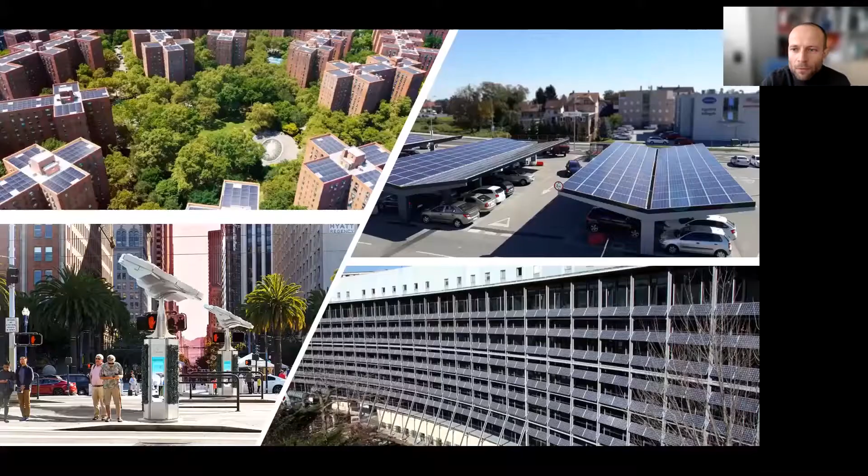And we have a mission that maybe it's less romantic than going to the moon, but that it's equal or more important than this old mission. And so, as I said, from my point of view, we have some solutions to promote the reduction of CO2 emissions in our cities. As you can see in these pictures...

I'm showing a lot of PV systems, different photovoltaic systems integrated in different kinds of buildings, on the roof, on the facade, integrated on the parking lots for instance, and also integrated on public areas that nowadays, today, are not used in a big way to produce electricity.

So let's see why we are focusing on cities. Because we know that more than half of the world population lives in cities. Cities consume about three quarters of the global energy used worldwide.

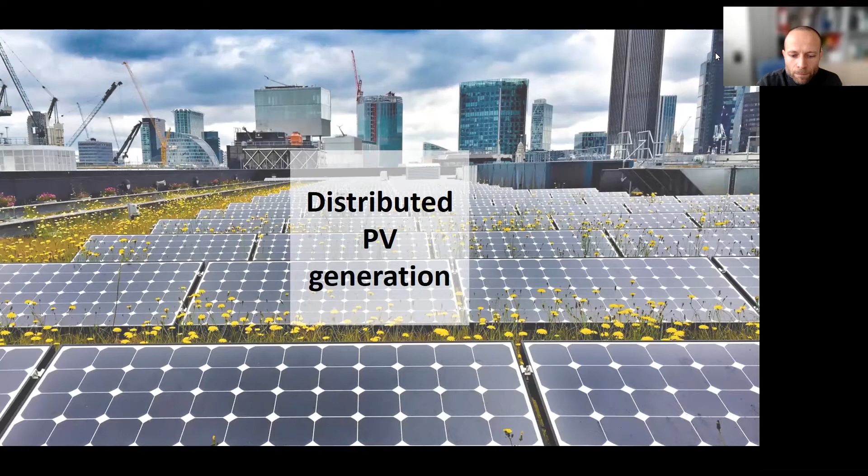In this presentation, I will talk about distributed PV generation as a tool to reduce the emissions produced by cities. First of all, I would like to clarify why we are speaking about distributed generation. Which are the advantages of these models in comparison with the centralized model we are used to the most today? First of all, distributed generation can improve the efficiency of the energy system.

This is very intuitive to understand: if we produce the electricity we use on the roof of our house or our office, or on the facade of our building, we are improving the efficiency of the overall system.

Think for a moment what happens with the food we buy to live. We are aware that if we buy an apple that has been grown in proximity of my city, I'm reducing the emissions of the food sector. And we need to make the same thing with energy. Energy cannot be a thing that comes from away, but it needs to be a thing we can produce closer to the loads.

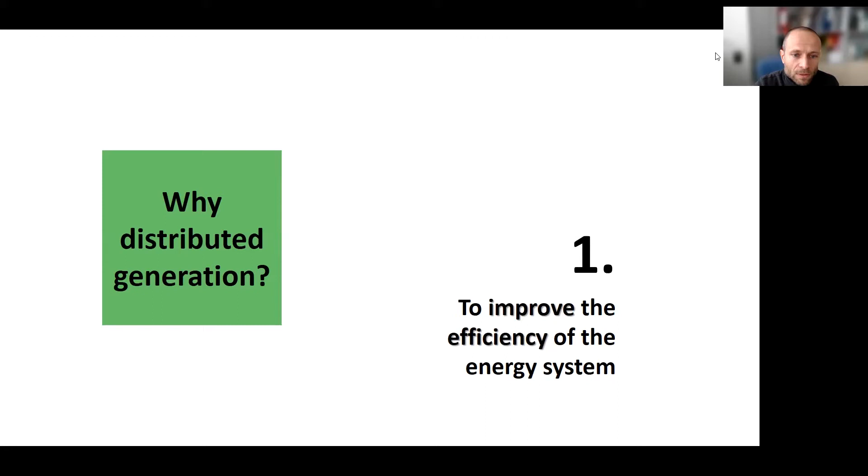So this is clear that we can improve the efficiency of the overall energy system if we introduce more distributed generation systems. The second point here is that to mitigate climate change impacts, it's much more relevant distributed generation than centralized generation.

I'm referring here not only to the reduction of emissions, but to the resilience of the system. We can think, for instance, that the frequency of extreme weather events like tornadoes, heat waves, extreme cold waves, etc. is going to go up in the next years due to climate change.

So the distributed generation systems are more robust compared to the centralized system, because if we can generate near the loads, we have more control of the elements that can work well or not work well. So we are providing a much more safe energy system from the point of view of energy supply.

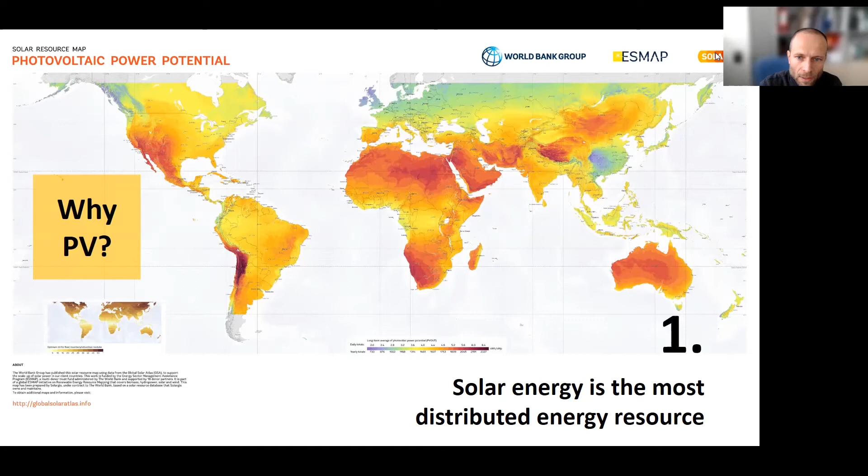The first one is that solar energy is the most distributed energy resource that we can use today. So it seems logical that if we are promoting a distributed generation system, we have to use a distributed energy source to implement it. You can see in this map that we have very wide access to solar potential worldwide, and we can use this technology in very different latitudes and very different sites worldwide.

The second reason is that PV is one of the cleanest and cheapest ways to produce electricity today. We need solutions today, not within 10 or 15 years, because we need to reduce emissions today to mitigate the effects of climate change. So let's see some numbers to justify this.

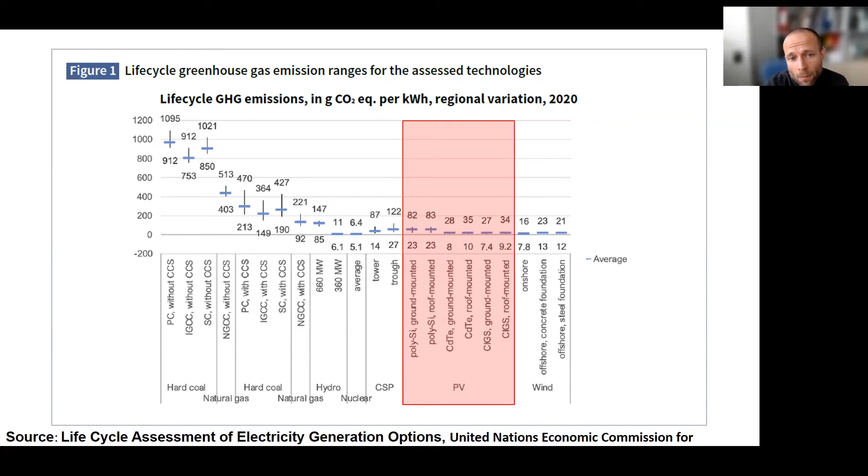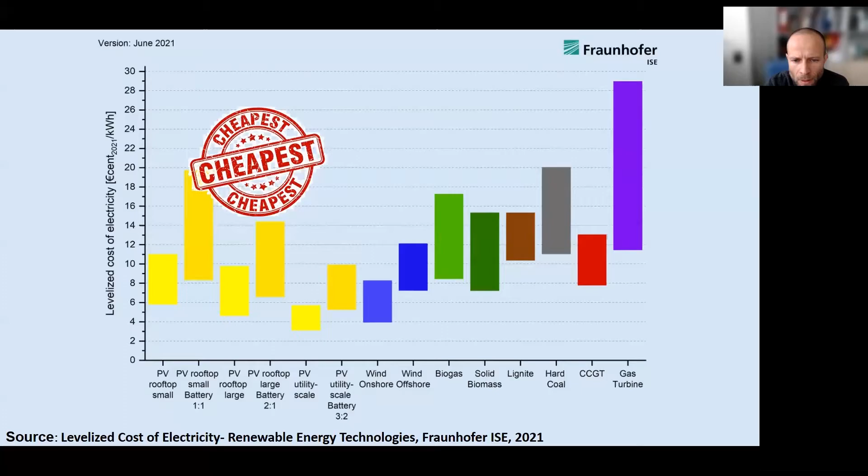So these numbers justify that we have today about 760 gigawatts installed overall in the world, but the big number is that about 20% of this power was installed in one year, last year in 2020. So this is a market that is growing very fast, and it is growing very fast because it's cheap to produce electricity with these systems.

And also, I would like to highlight that the share of distributed PV generation is increasing in the last years.

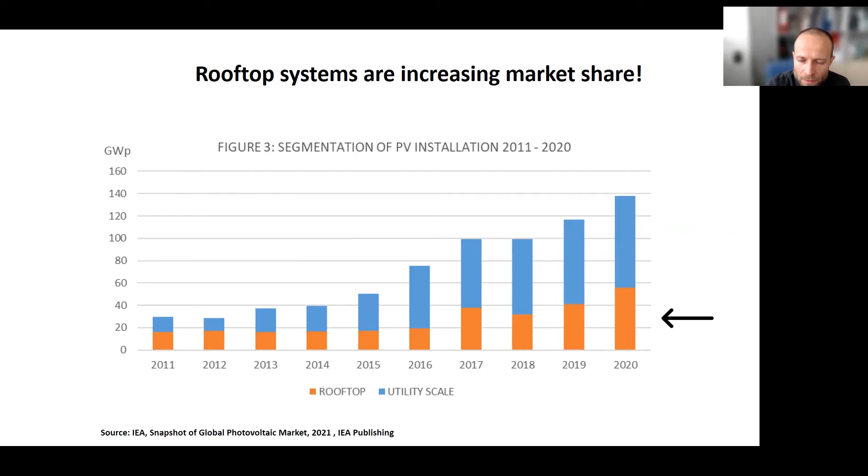You can see here that PV systems, not all of them are distributed systems, because we have also a lot of PV plants, but the number of rooftop installed systems is increasing market share. So this is good news, because the distributed model is improving its weight in the market of PV.

Another reason is that cities' electricity demand will increase in the next years due to two main factors. The first one is the electrification of mobility, with the diffusion of electrical vehicles, but we also have to take into account the electrification of heat, based mainly on the use of heat pumps for heating in buildings in general. These are the two main reasons for the increase of electricity demand in cities.

So we need a technology that produces electricity in cities without increasing emissions. I would also like to highlight that PV can be extensively used in human settlements, because it's the safest source of energy we can use today.

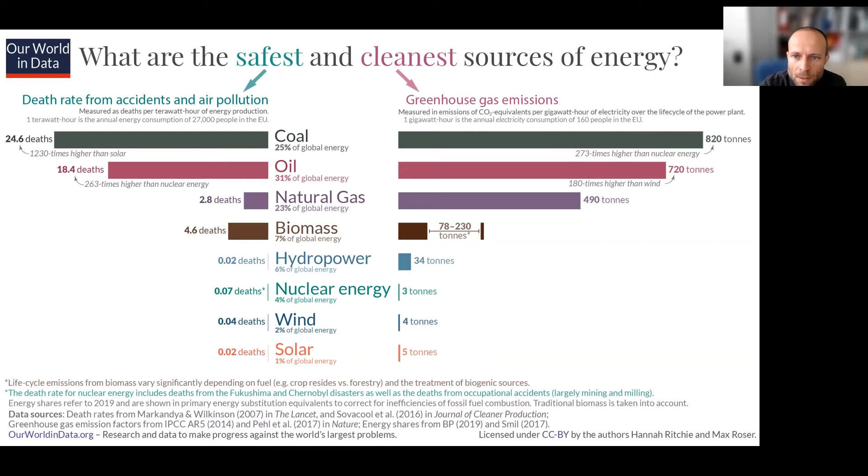Solar energy only has 0.02 deaths per terawatt hour of energy production. So we can confirm that solar energy is safe for human life, and also safe for the planet, as you can see on the right side with the greenhouse gas emissions of these different technologies.

Last but not least, PV can be beautiful. We live in Europe, we live in very beautiful cities. We cannot renounce the beauty of our city to produce energy, to produce electricity.

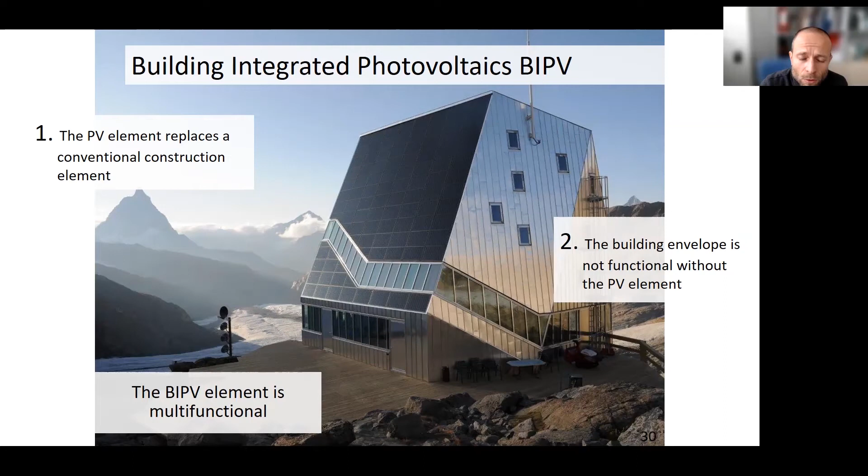You can see in this other example, a mountain hut in the Alps, that the PV element replaces a conventional construction element. We are not adding PV modules to the building, but designing the building with PV elements - a very different thing. You can see that the building envelope is not functional without the PV element. So the BIPV element is multifunctional.

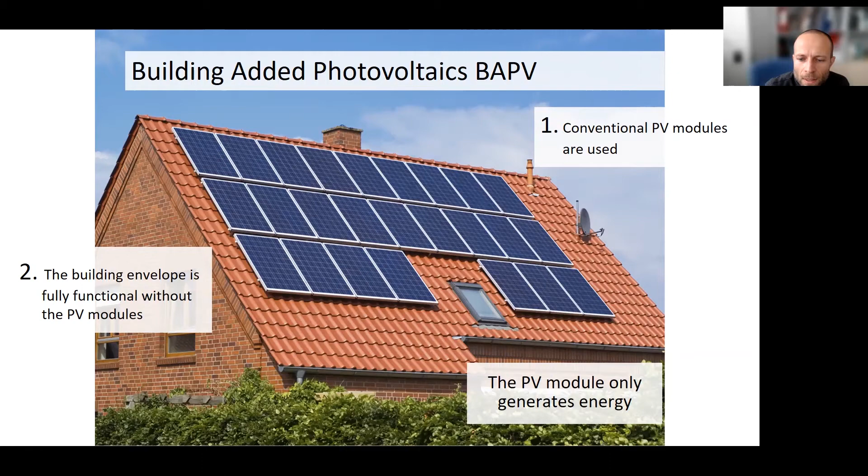This is very different from the system we see most frequently in our cities, in which conventional modules are used. The building envelope is fully functional without the PV modules, and the PV modules only generate energy.

So if we compare both solutions, you can see that obviously there are a lot of differences. It's like comparing the Champions League on the left side with the amateur league of my town on the right side, from the architectural point of view and from the quality of integration.

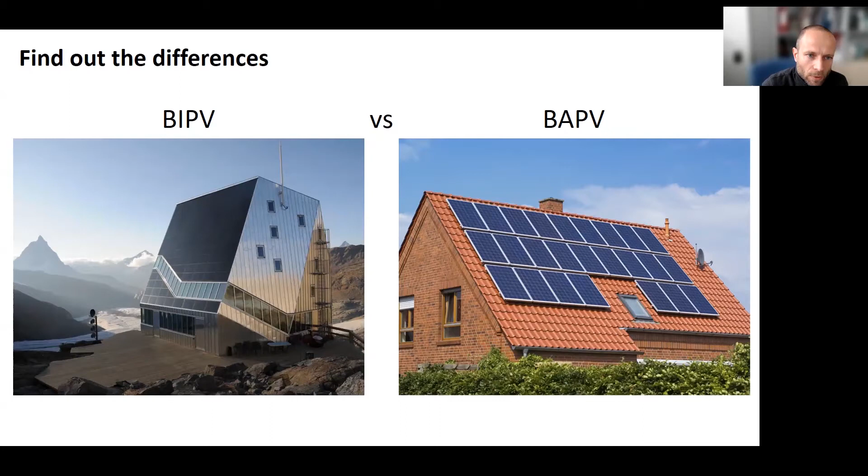I'm not saying that we have to only integrate PV, that we have to only do BIPV systems. We can do added systems too - it's not a problem. But I think we have to spread the use of BIPV systems in our cities.

And we can do it, because there are a lot of solutions in the market nowadays to convert our passive buildings into small power plants, simply using different materials that are not being used nowadays in a very widespread way.

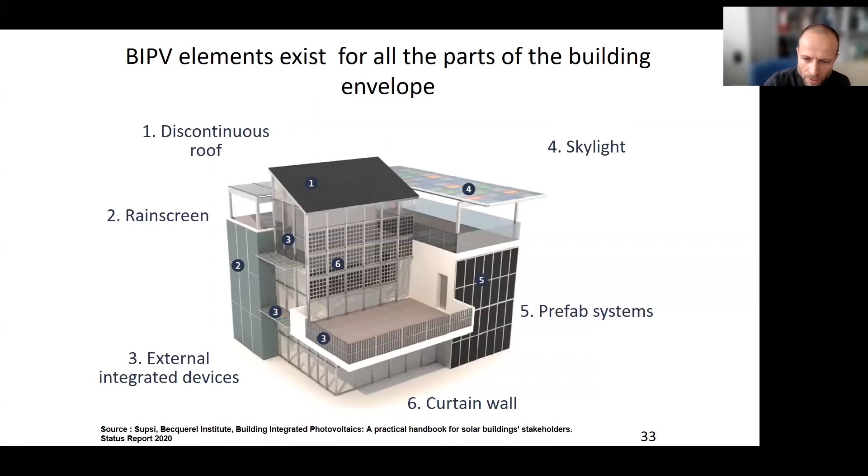Another thing I would like to say is that there are a good number of specialized companies, and most of them are European companies. So we have a very good opportunity to spread these solutions in Europe.

So that's it - we have the solution for the energy transition. It looks like, it seems, that there's no problem in promoting the transition in our cities. Maybe it's sure, but for the moment we are far away.

If we look at how we got our electricity last year, looking only at the electricity system, 2.7% was produced using solar technologies. And if we look at the big picture of the total energy system, including transport and heat generation, the number is as low as 1.1%. So we have a very long way to go to improve this number and increase the share of this technology in the different markets.

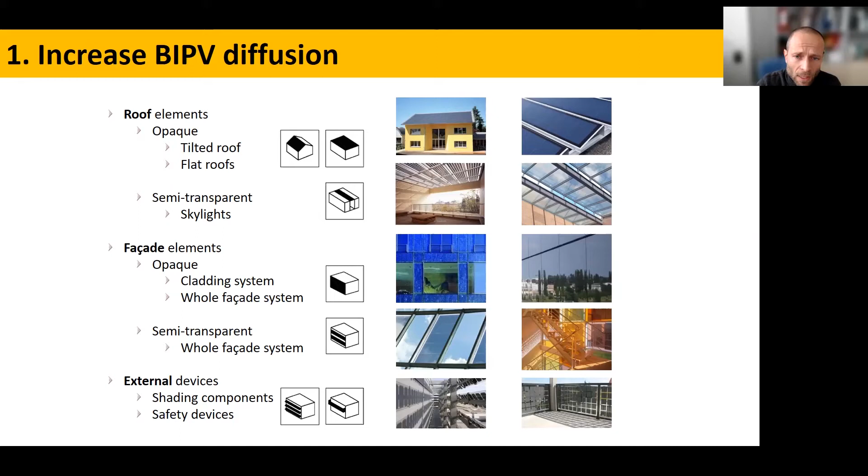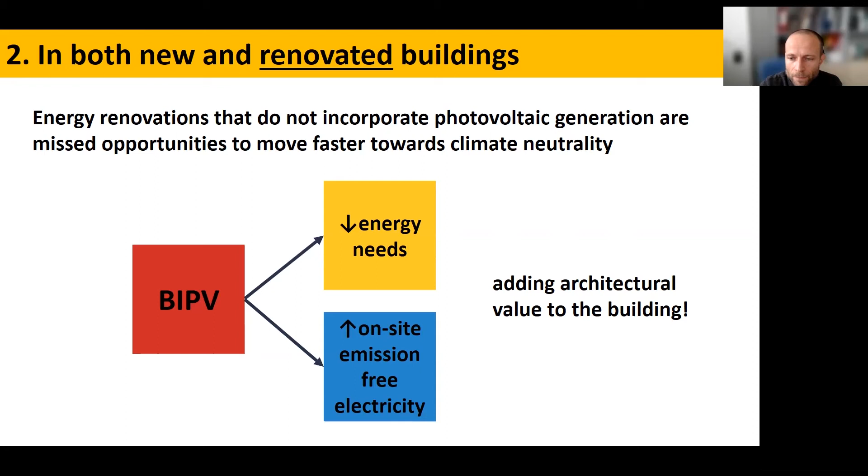It's very important to take into account that renovation projects are as important as the new buildings we are building today. Energy renovations that do not incorporate PV generation are, in my opinion, missed opportunities to move faster toward climate neutrality of our buildings, of our cities in general. With BIPV systems, we can reduce the energy needs of the building as in a typical passive refurbishment project: insulate, improve the thermal performance of the envelope, the glazing, etc. But BIPV also allows on-site emission-free electricity generation, and also adds architectural value to the building that is not possible with other solutions.

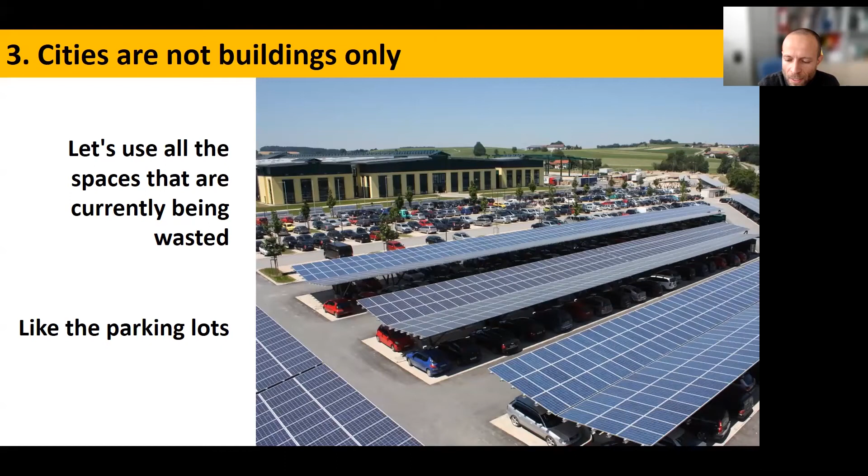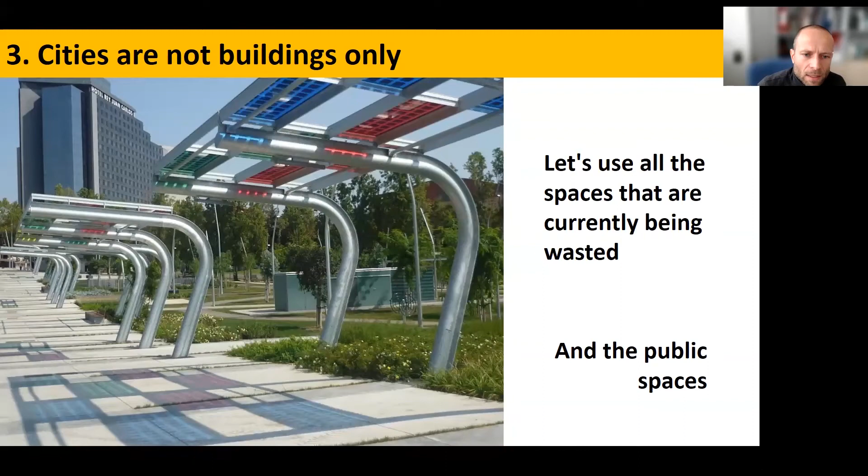And in the same line, there are a lot of public spaces that are not used, and that can be used to produce electricity with photovoltaics. In this sense, I think there is a very big interest in adapting concentrator PV to the built environment. Concentrator PV are a specific type of PV system in which an optical part is used to concentrate the sun into small, very efficient PV cells.

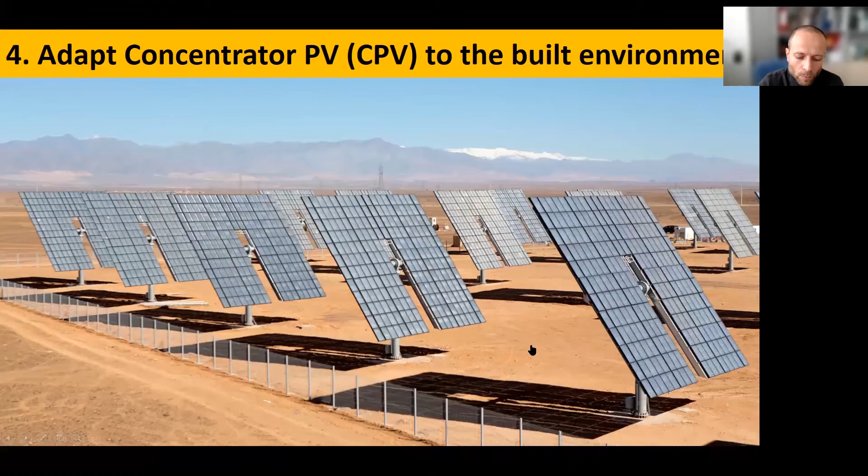This technology has been used in large power plants, but it can also be adapted to be used in the built environment. The most interesting thing is that, as you can see, these systems have a very small footprint. In our cities, we have small surfaces in general to generate electricity, and the surface is extremely expensive. So technologies like this one, that can generate big amounts of electricity with a small footprint, are very interesting to integrate into our cities.

We have recently worked on a research project to adapt concentrator PV to the built environment. You can see here the results of this project. It's called PowerTree — a high concentrating photovoltaic system installed on an element that has much more features than a conventional CPV system. We have integrated a lighting system and also nature-based solutions to improve the air quality in the urban environment.

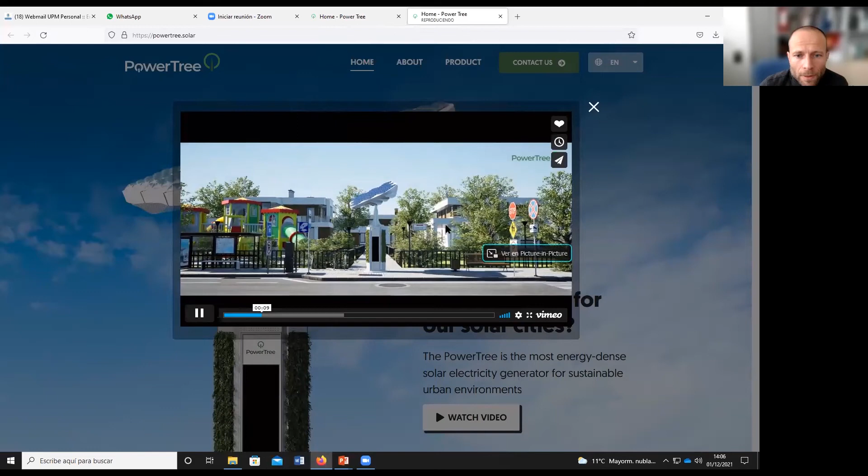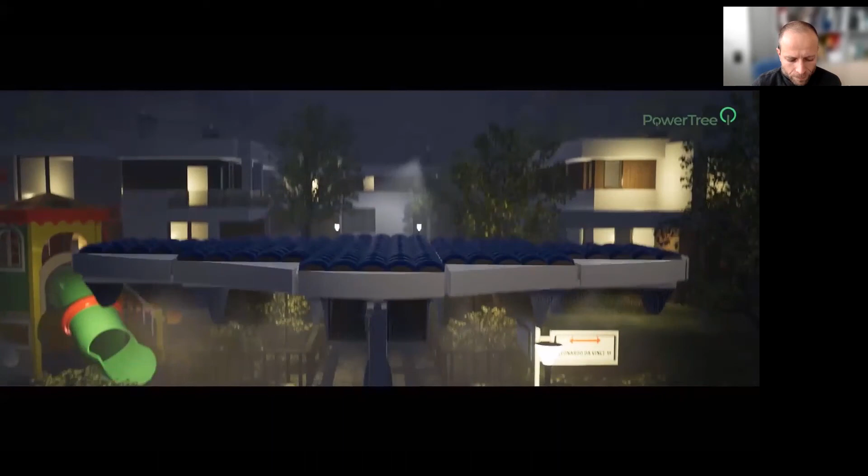I would like to show you a video about the system, about the PowerTree. Let's see if it works.

So in the next years we are going to see a lot of this kind of adaptation of other technologies from other fields, for example from big power plants, to be integrated into our cities. I think this is a new field of research in which we need the knowledge from engineers, from architects, from botanists, from a lot of different fields of knowledge to build effective solutions.

So that's all from my side. Thank you very much for your attention, and I would like to answer questions.